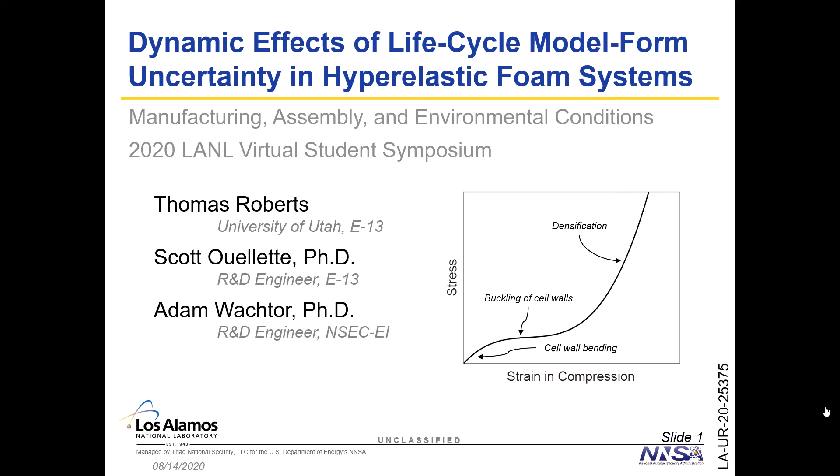To illustrate this, I'm going to spend a few minutes today talking about different forms of uncertainty in engineering systems, how we are studying and quantifying the effects of these uncertainties, and how we as engineers can support a full lifecycle analysis from a computational perspective. The overarching question that this presentation aims to answer is how do material parameters, preloading, and environmental conditions affect the dynamic response of a suspended mass and closed-cell foam system.

I want to break this question down into four main areas of study, the first of which is parametric modeling. Here we use parameter sampling strategies to help us inform our engineering quantification of margins and uncertainties. We then want to use these techniques to help us understand how uncertainties in the manufacturing process, assembly conditions, and environmental inputs will change the dynamics of the system.

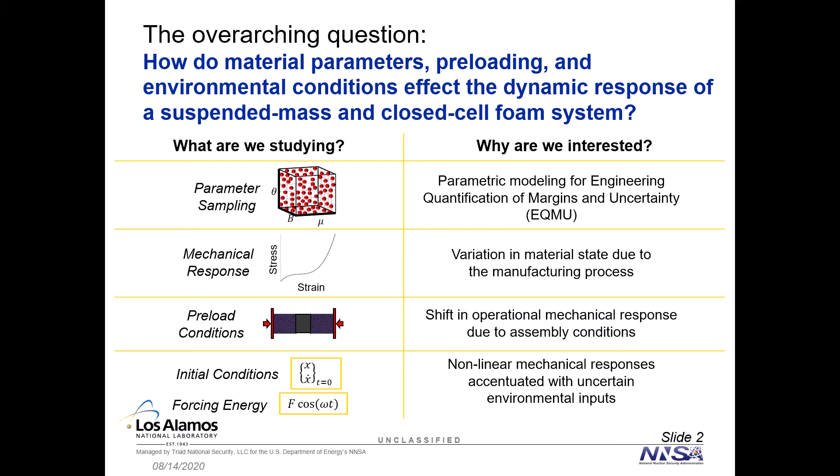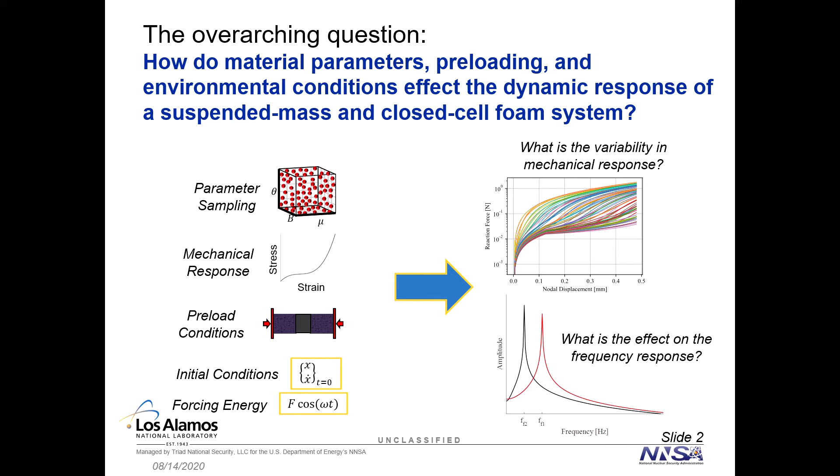In short, this work aims to answer how uncertainties in the manufacturing process and assembly conditions can change the mechanical response of the material. And then finally, we want to know how that, coupled with uncertain environmental inputs, can change the frequency response of our system.

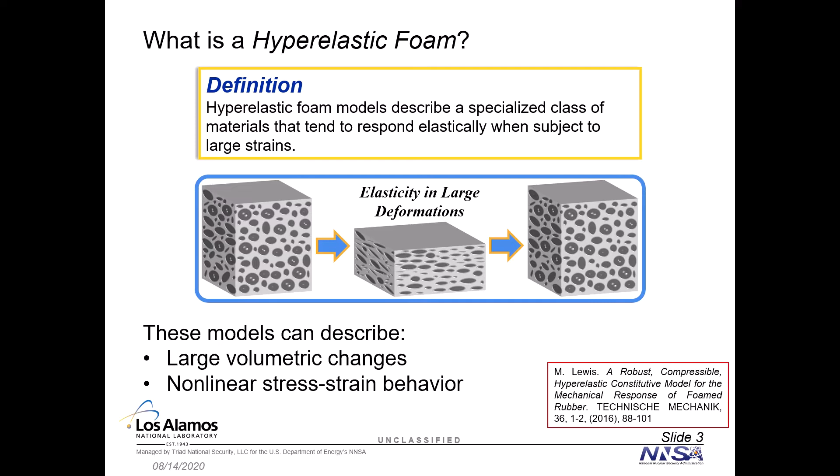At this point, I've probably used the words hyperelastic and closed-cell foam a couple of times, and I want to formally define this here. Hyperelastic foam models can describe a specialized class of materials that tend to respond elastically when subject to large strains. These types of models can describe large volumetric changes and nonlinear stress-strain behaviors, the latter of the two which will be of primary interest to us as we start to think about the engineering challenge that is using these materials. With such a large parameter space of material properties and environmental conditions, closed-cell foam can be a very versatile tool for absorbing shock and vibration.

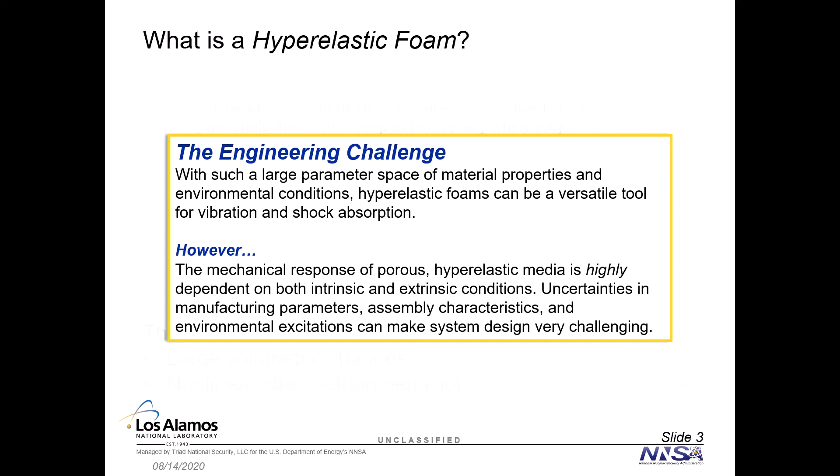Unfortunately, the mechanical responses of these types of materials can be very dependent on both intrinsic and extrinsic conditions, so uncertainties in the manufacturing process, assembly characteristics, and environmental excitations can make designing systems with these types of materials rather challenging. The first class of model form uncertainty I want to discuss in this presentation is uncertainty due to the manufacturing process. To look into this, we did an initial parametric study of our hyperelastic foam model where we varied 3 of 9 possible material model parameters to create a parameterized suite of finite element models.

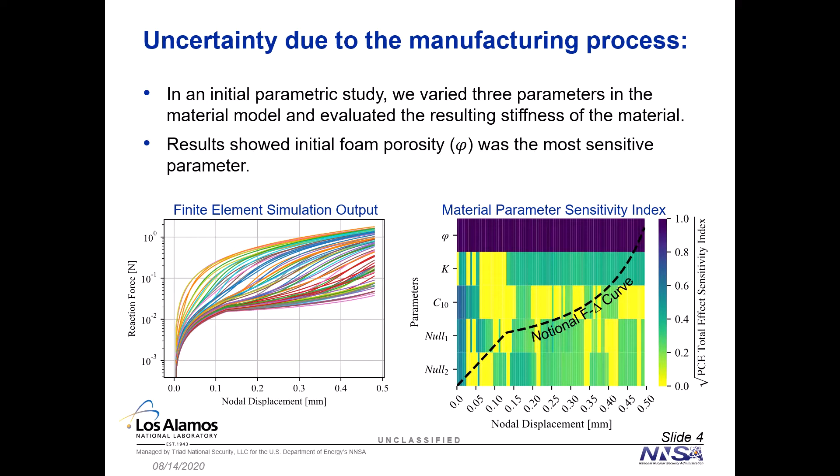What we can see here is that the initial porosity of the model, or this variable phi, shown in this dark purple color in the very top, has a very significant effect on the stiffness of the model over the entire operating strain regime of the material. So what we can gain from this is that when we manufacture these foams, we absolutely need to know our value of initial porosity. Otherwise, we're going to induce some unnecessary uncertainties into our prediction.

The second type of model form uncertainty that we're interested in is that due to the variabilities in assembly conditions. Closed-cell foams are specifically designed to be pre-compressed along a wide band of material strain regimes to allow us to design for specific dynamic characteristics for a particular system.

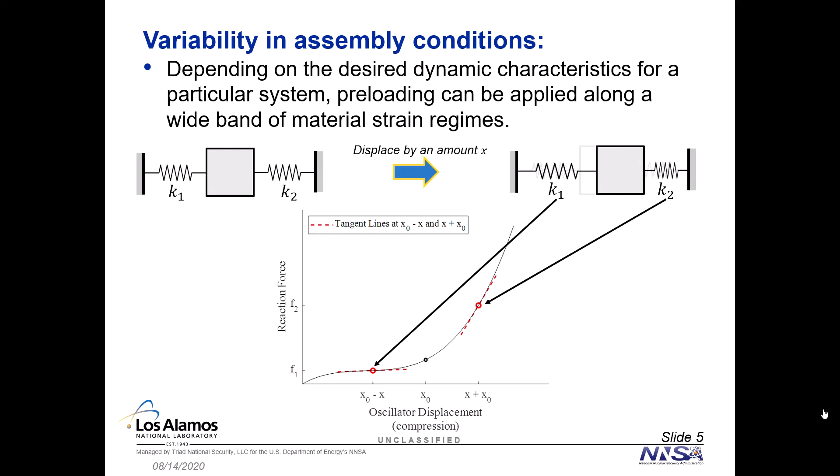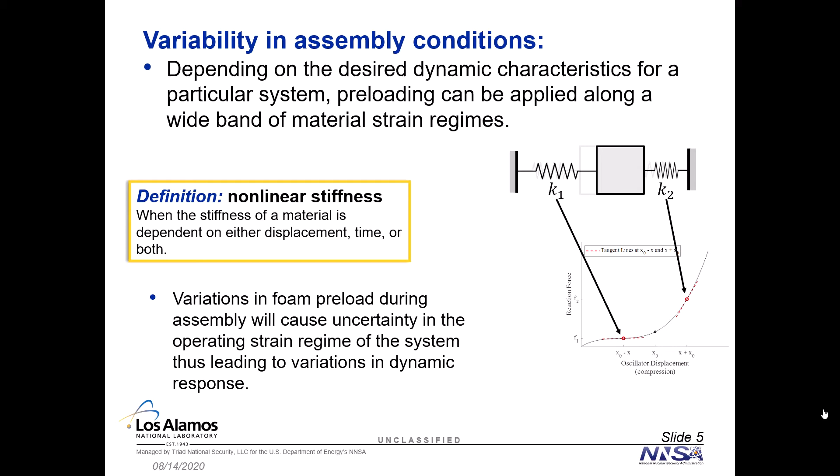And this is exactly the definition of a nonlinear stiffness, wherein the material stiffness is dependent on either displacement, time, or both. And knowing that our material has these characteristics, we can come to the conclusion that variations in the foam preloading during assembly can cause uncertainties in the stiffness of the system and thus will lead to some significant variations in the dynamic response.

Our final consideration of model form uncertainty comes from unknowns in the environmental excitations around the system. Environmental unknowns can accentuate the system's nonlinear behavior, especially when we talk about things like large amplitude oscillations, where large deflections can lead to drastic changes in material stiffness, and strain rate sensitivity, which is a property of the material itself, wherein the faster the deflections are, the stiffer the material will respond.

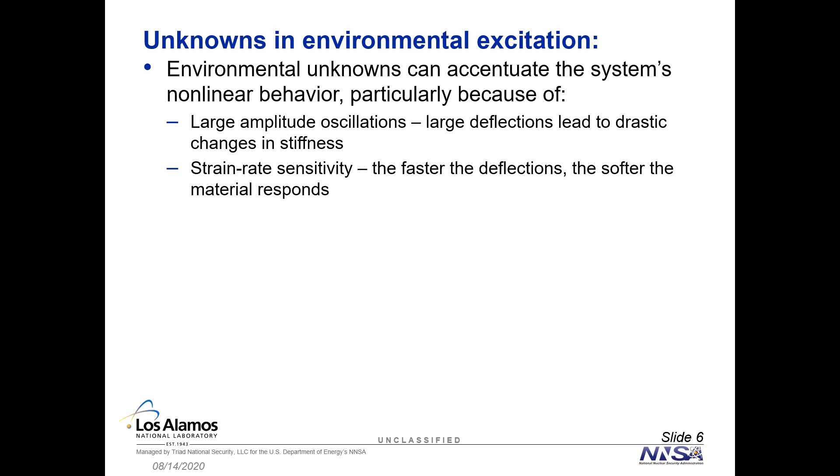To illustrate how some of these uncertainties can affect the overall mechanical response of the material, I want to look at 3 specific cases. In each case, we're going to examine a force displacement curve shown on the left and a stiffness versus time profile shown on the right. In each plot, there's a red dot which represents the operating strain value of a piece of foam, and the 2 red dots in these plots are synced with time across all the animations.

To drive these points home, I want to consider one last drastic case where we oscillate in a highly displacement sensitive material strain regime. So we can see as our red dot oscillates over this sharp bend in the force displacement curve, we get some very drastic jumps in the stiffness over time, and this is going to make it almost impossible for us to design dynamic characteristics that we are interested in.

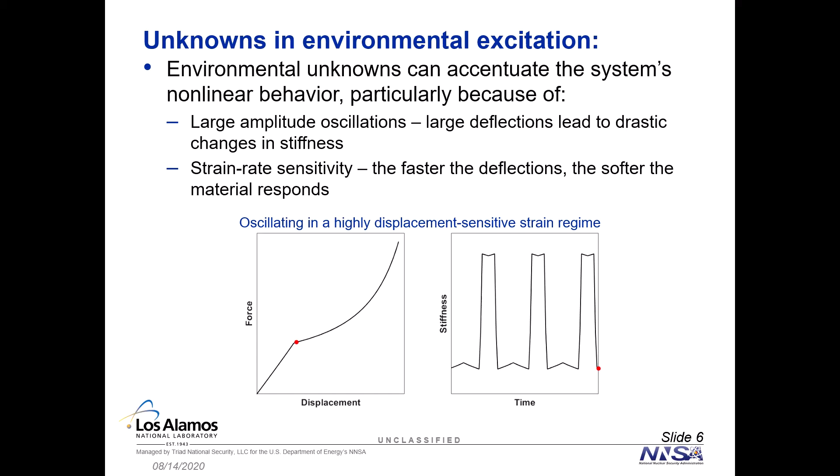So this should at least be enough motivation for us to see that we need to actually know something about the uncertainties in our systems, otherwise we're going to have these type of effects and not be able to design our systems effectively. Now that we've talked about all the types of model form uncertainty that we're interested in analyzing, I want to gloss over the computational tools that allow us to do just that.

The first tool that we use is a full system finite element model that consists of 2 pieces of foam and a suspended mass in between the pieces of foam. This is an implicitly preloaded and explicitly excited system that's meant to replicate the real-world environments that could possibly be imposed on this system.

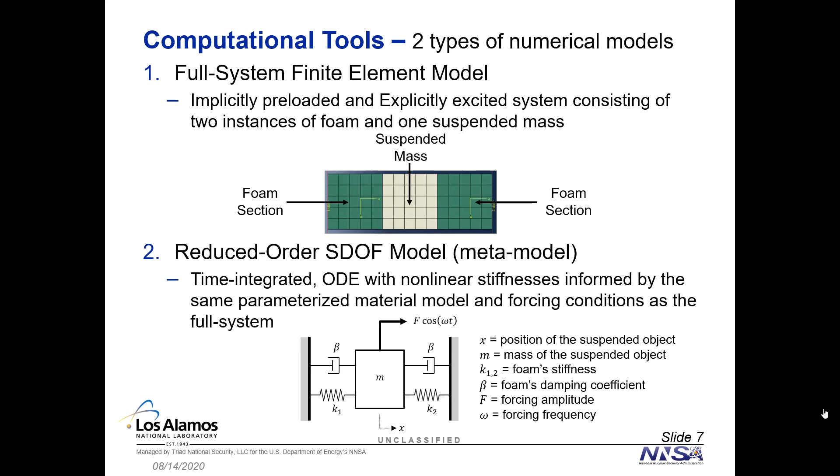The second computational tool that we use is a reduced order single degree of freedom mass spring damper model. This is a time-integrated ordinary differential equation that has nonlinear stiffnesses informed by the same parameterized material model and forcing conditions as the full system. And this second computational tool was meant to be an efficient way of giving us some sanity checks on whether or not our full system computationally expensive models are giving us reasonable results.

At this point, you might be wondering how it's even possible to support this type of computational framework, but it's actually a rather simple process to explain. Any engineering baseline computational model, or template model you could call it, will have approximately the same 6 steps from start to finish. The first 3, which are geometry definition, meshing, and solver preparation, are generally going to remain consistent for any one template model. But it's once we get to the solve step where we can actually introduce our parameterization strategies.

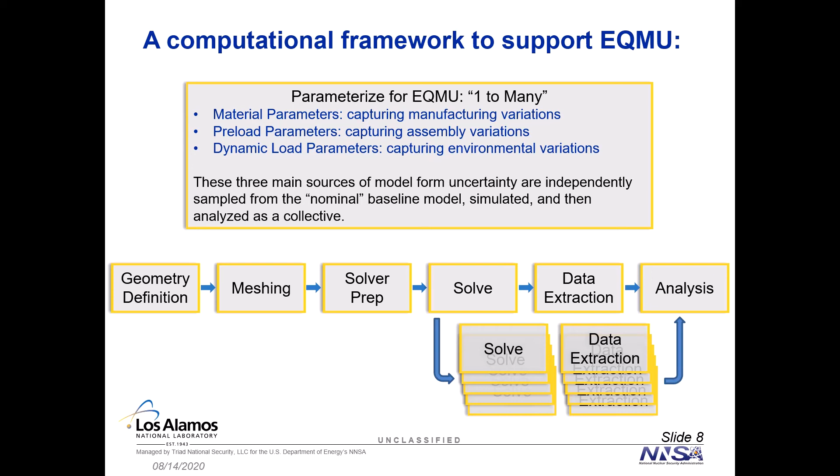Here, we can take our 3 main sources of uncertainty, which were material parameters, preload parameters, and dynamic load parameters, and we can independently sample them from our nominal baseline model. Once we've done that, we can simulate all of these models simultaneously and then analyze them as a collective. And by doing this, we can create an agile and informative framework that allows us to properly assess how uncertainties throughout the entire engineering lifecycle of our system will affect our overall response, regardless of what the response of interest is.

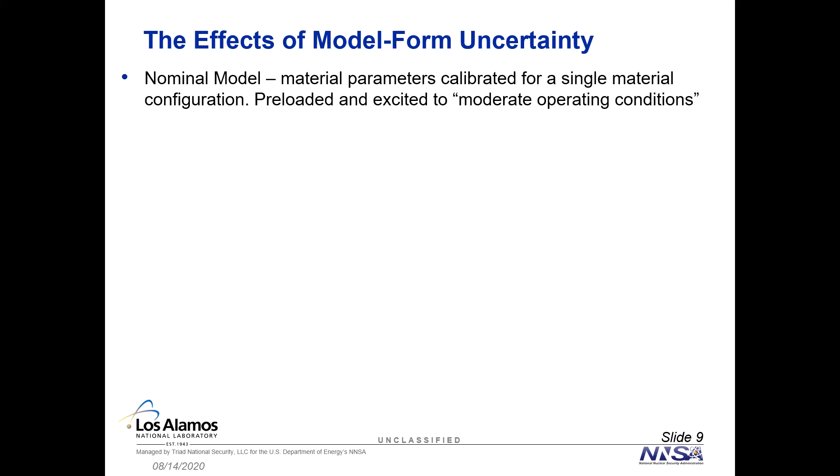To conclude the presentation, I want to show some comparisons between a nominal model and some models where we considered the effects of each of these three types of model form uncertainty independently. Here, a nominal model has material parameters calibrated for a single material configuration, and then the model is preloaded and excited to moderate operating conditions.

We see even more uncertainty in the fundamental frequency of the system when we consider things like preloading uncertainty. Here, we varied the preload in the model from 0 to 48% strain, which represents the holistic operating strain regime of the material model, and we see even bigger shifts in fundamental frequency, sometimes upwards of 185% in this particular parameter space.

And finally, we start to see some really interesting things occur when we consider uncertainties in the environmental conditions. In these models, a shock excitation was applied in the form of an instantaneous initial velocity constraint to the suspended mass, and the figure on the left is showing us that, yeah, even though we varied this initial shock velocity, we get errors of about 16% in this first fundamental frequency.

However, some interesting things start to pop up as the intensity of this shock excitation starts to increase. Once we get to these higher levels of excitation, we can see that more peaks start to appear in the system's frequency response, and this tells us that the system is starting to become nonlinear in its vibration, and now we don't just have one natural frequency to design around, we have multiple that pop up at higher energy and higher frequency ranges.

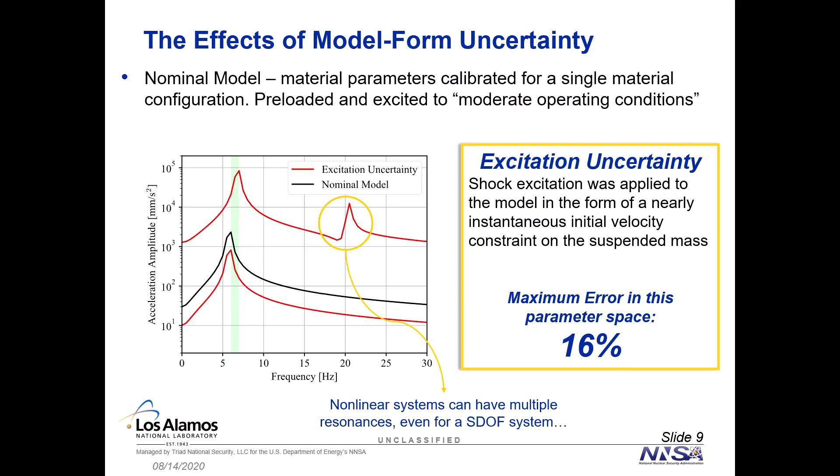So the combination of all 3 of these types of model form uncertainties can have significant effects on the response of our model, and we need to consider this as we start to design our engineering systems, especially from a science-based and computationally based perspective.